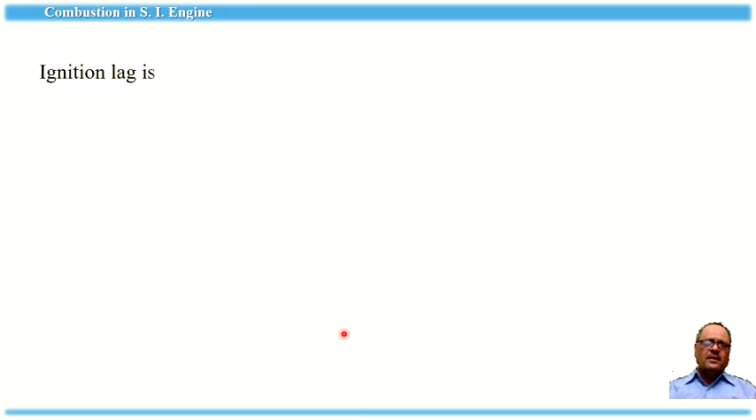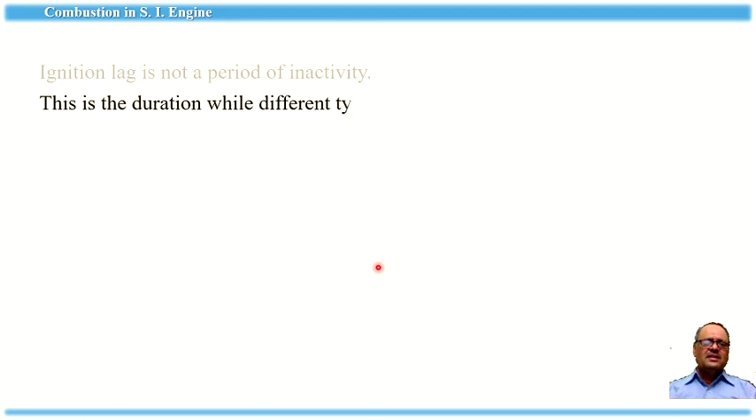First of all, what is ignition lag? As we have discussed already in the previous part, ignition lag is not a period of inactivity, as the conception is. This is basically a duration while some chemical reactions take place behind the screen. And these chemical reactions produce initial combustion, or initially heat up the particles of the charge to reach the self ignition temperature of the fuel and ignite some particles of the fuel, so a self propagating nucleus of flame is established.

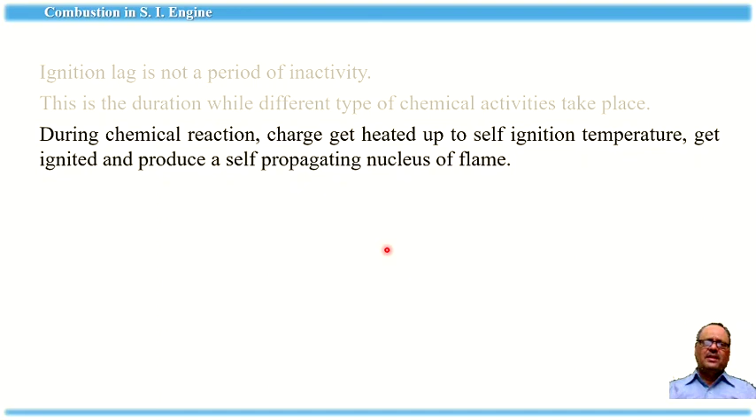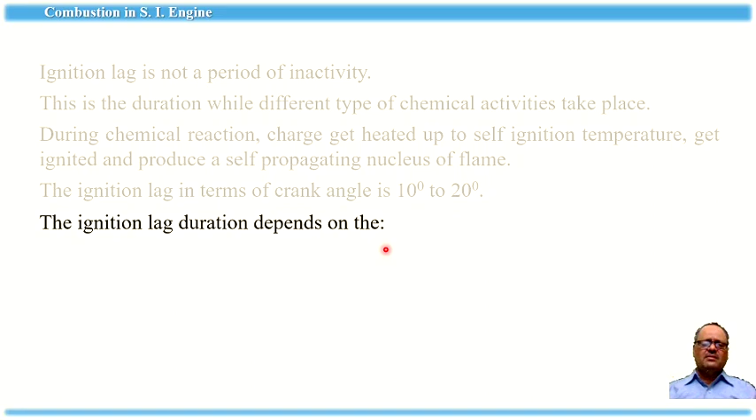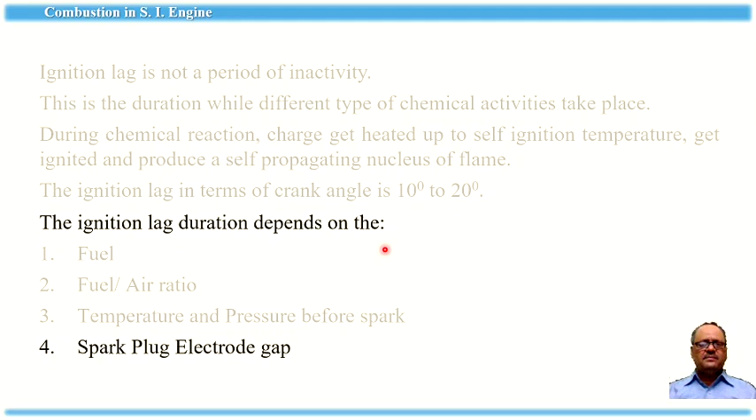The ignition lag in terms of crank angle is generally 10 to 20 degrees, and this duration depends upon the following factors. First is fuel, second is fuel air ratio, third is temperature and pressure before the spark, fourth is spark plug electrode gap, and fifth is the turbulence in the combustion chamber.

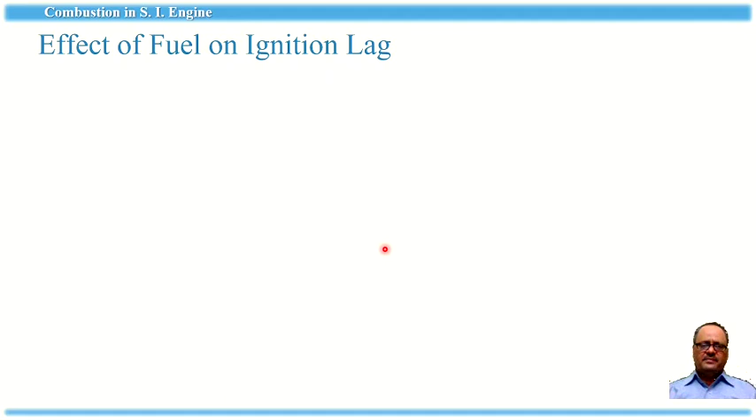First of all, we will discuss the effect of fuel or type of fuel on ignition lag. Basically, ignition lag depends upon the chemical nature of the fuel. The temperature at which the fuel starts combustion is called the self ignition temperature of the fuel. Higher the self ignition temperature of the fuel, longer duration of chemical reaction is required to achieve this high level of temperature.

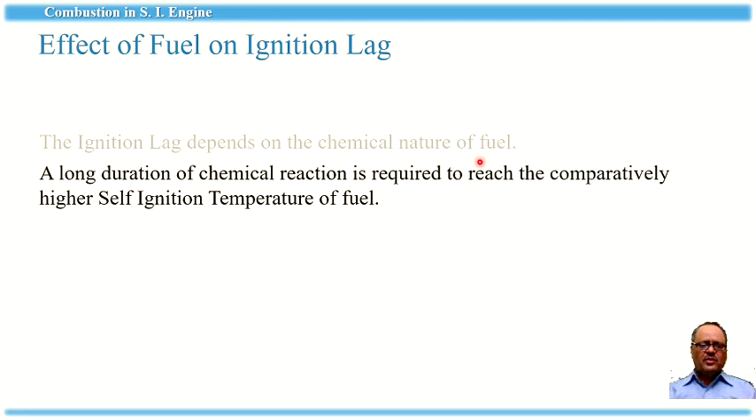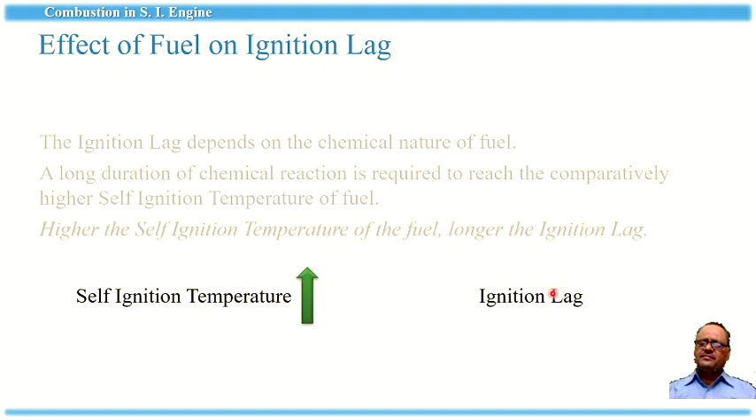So chemical reactions take a long duration to reach this higher self ignition temperature. So it is apparent that higher the self ignition temperature of the fuel, longer is the ignition lag. That is the self ignition temperature in comparison with the ignition lag. Higher the self ignition temperature, higher is the ignition lag.

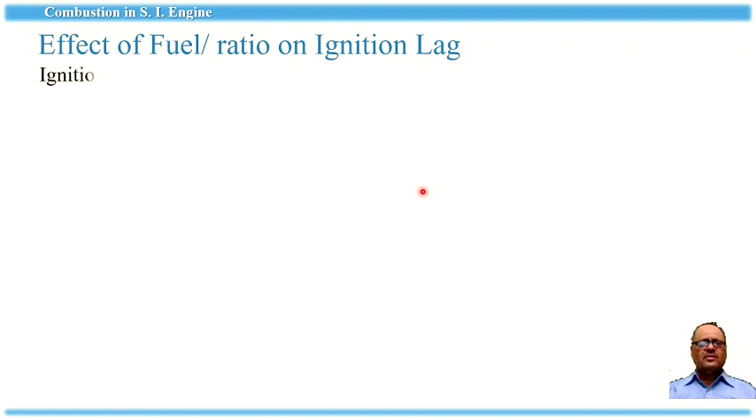Second parameter is the effect of the fuel air ratio on ignition lag. What is fuel air ratio? It is just opposite to the air fuel ratio. Ignition lag is smallest for the ratio which gives the maximum temperature on combustion, that is, the fuel air ratio which provides the highest temperature. Now let's discuss some key points about the fuel air ratio or the air fuel ratio.

As we know, you may wonder, the stoichiometric fuel air ratio is sufficient to produce the maximum temperature, the maximum power, the maximum fuel efficiency. Why not use the stoichiometric air fuel ratio? Why are we discussing fuel air ratio here? Because the stoichiometric ratio is ideally or theoretically a ratio which provides maximum temperature, maximum pressure, maximum work output, maximum power, or maximum fuel efficiency.

But in practice, it is quite impossible to produce a stoichiometric air fuel ratio throughout the charge, because when we produce a charge, there is little time for mixing the air with fuel. So what happens? The charge is never in a homogeneous state. It is heterogeneous in nature.

Considering the fuel air ratio, some places in the charge are higher in fuel, other places may be lower in fuel, and some places are at the correct stoichiometric ratio. So it is quite impossible to make a homogeneous mixture where at every point a stoichiometric air fuel ratio is present. So this is quite impossible.

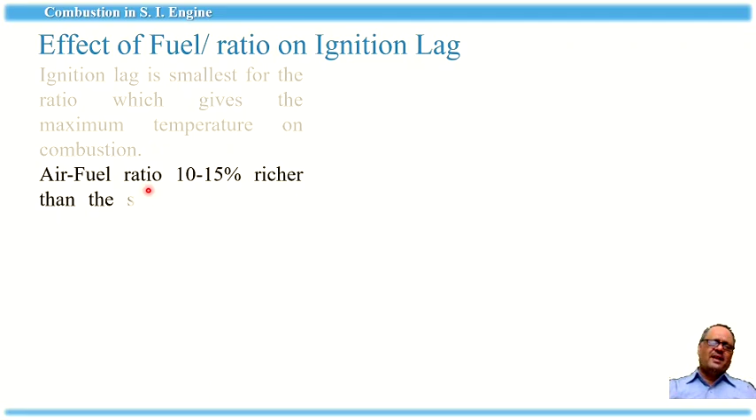And suppose in second parameter we want a slightly higher, richer air fuel ratio. This is because in that case we want to assure the full utilization of oxygen. So there are two approaches: full utilization of fuel or full utilization of oxygen. If we want full utilization of oxygen, we provide higher fuel, so we may assure that full oxygen will be utilized in that case. And full utilization of oxygen provides us the maximum temperature, maximum pressure, and the maximum power, or the maximum torque.

So if we need maximum torque, maximum power, maximum temperature, then we provide a slightly rich air fuel ratio, that is, higher fuel. And if we want fuel efficiency, the proper utilization of fuel, then we provide higher oxygen or higher air. So we provide a lean air fuel ratio to get the highest fuel efficiency.

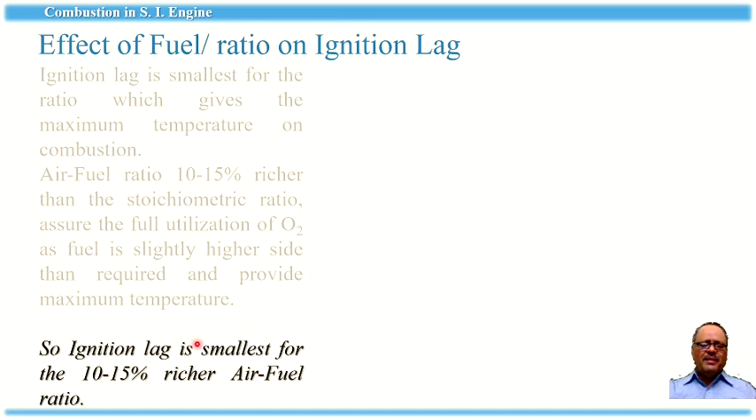In that case, we will provide a 10 to 15% richer air fuel ratio. This richer air fuel ratio assures the complete utilization of oxygen, and at that time, ignition lag is smallest for the fuel air ratio 10 to 15% richer, because it will provide us the maximum temperature, and the ignition lag reduces as the temperature increases.

As you see in this graph, this is a graph between the ignition lag, displayed on the vertical axis in milliseconds, and fuel air ratio. The percentage of stoichiometric is presented on the x-axis. This is 100%, that is the stoichiometric ratio. This is slightly richer, that is the fuel air ratio, not air fuel ratio. So 120, that is 20% rich, or 40% rich. This is 80%. This is the lean ratio, so 20% leaner than the stoichiometric.

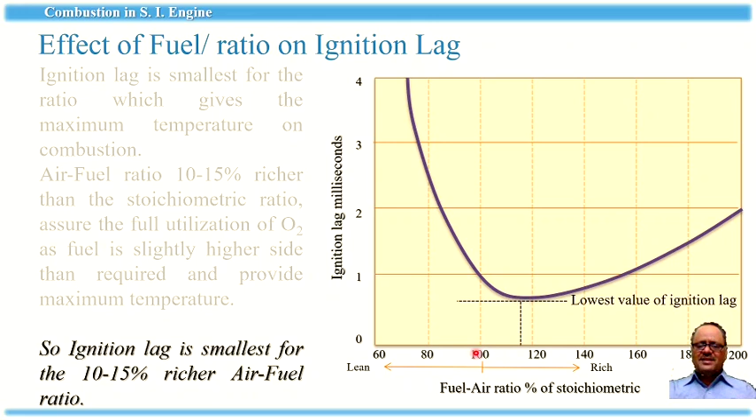As you see, the ignition lag is continuously reducing and then again goes higher. This is the lean side of the fuel air ratio, this is the rich side. At the leaner fuel air ratio, the temperature is low because oxygen or air is higher, and a higher amount of fuel produces a cooling effect. So an excessively rich ratio also provides less temperature, so the ignition lag increases. So the sweet point is here, which is 10 to 15% richer than the stoichiometric air fuel ratio.

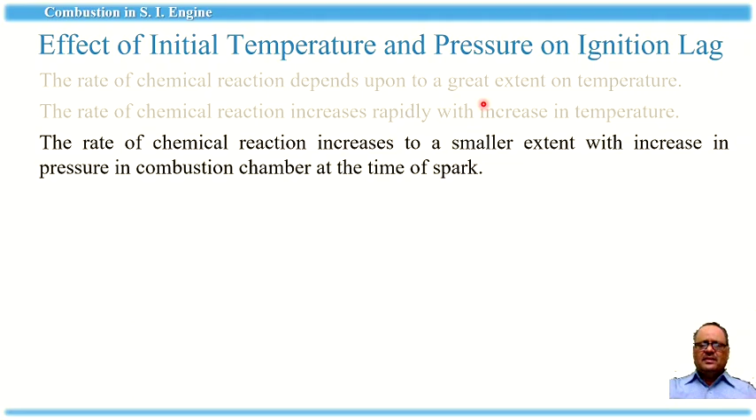Now the second parameter is the initial temperature and pressure and its effect on ignition lag. Basically, we know that the rate of chemical reaction mainly depends upon the temperature. Higher the temperature, higher the chemical rate. Chemical reactions also depend upon pressure, but the rate of chemical reaction increases rapidly with the increase in temperature. The rate also depends to a smaller extent on pressure. As the pressure increases, the rate of chemical reaction also increases, because the closeness of the reactant particles assures a higher rate of chemical reaction, but it is much less in extent than the temperature parameter.

Suppose we increase the intake temperature or intake pressure, or if we increase the compression ratio, all eventually increase the temperature and pressure at the end of the compression stroke. If we increase the intake temperature, after compression the temperature will be higher. If intake pressure is higher, then after the compression stroke pressure will be higher, and if compression ratio is higher, definitely the pressure after the compression stroke will be higher. And this is the time of spark. So at the time of spark, if intake temperature, pressure and compression ratio are increased, the temperature and pressure are both increased at the time of spark.

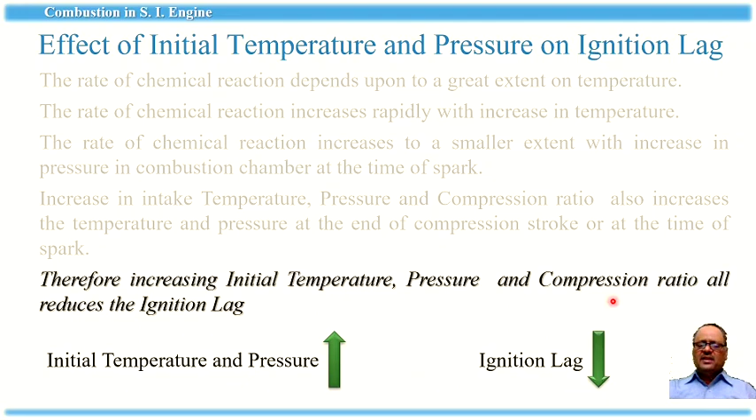Therefore, increasing initial temperature, pressure and compression ratio all reduce the ignition lag, because as the temperature increases, chemical reaction speed increases, and as pressure increases, the chemical reaction speed also increases. As the initial temperature and pressure increase, the ignition lag reduces. So this is all in this section of part 3a.

In the next section, part 3b, we will discuss other parameters like electrode gap and turbulence.